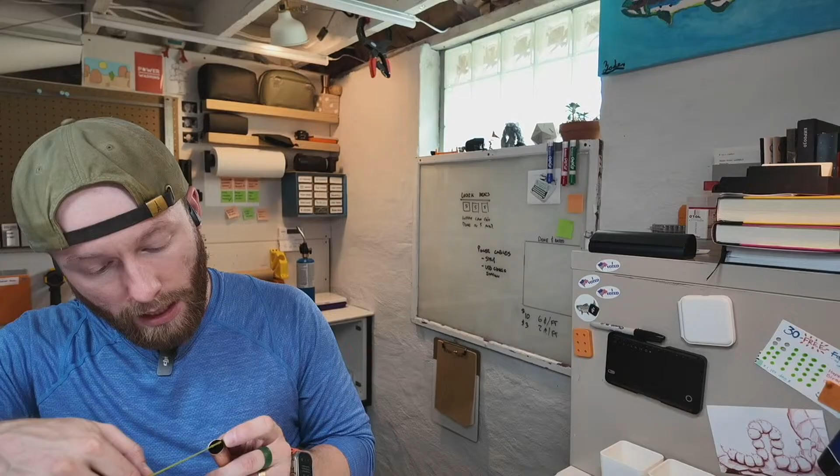First step is we need to take some measurements, and by golly, I think I left my calipers upstairs. We're going to say a 1/2 inch - actually, let's just measure it. Anybody know what a 1/2 inch to... actually it's not a 1/2 inch, it's 5/8. I'm glad I checked. So we're going to just do 5/8 inch to millimeters - we're looking at 15.88 millimeters.

So let's go ahead and put that in here. So I'd start a new sketch, we'll do top, and we can add a circle. There you go everybody, that makes more sense probably for everyone. 15.88, so that's a bit exact. We're going to add a variable - pipe, we'll do PD, pipe diameter. And then we'll just make this the PD.

I was watching my stream last week, and I was thinking about clipping some of it and putting it into the shorts. I was going to do some of the modeling stuff, and I realized I was spending so long being finicky with the names of things, it was actually kind of a bear to watch. So I apologize for anyone who was watching the stream last week and me struggling through naming variables.

All right, still no new questions. Oh, Gary Wallace finally catching up on the live. It's going good, how's work for you?

Curtis Willie says, any idea how you will do Etsy reviews when you start your Patreon? Congrats on 10K, by the way. Thank you very much, I would love a review, but wasn't sure if it would be on live stream or video.

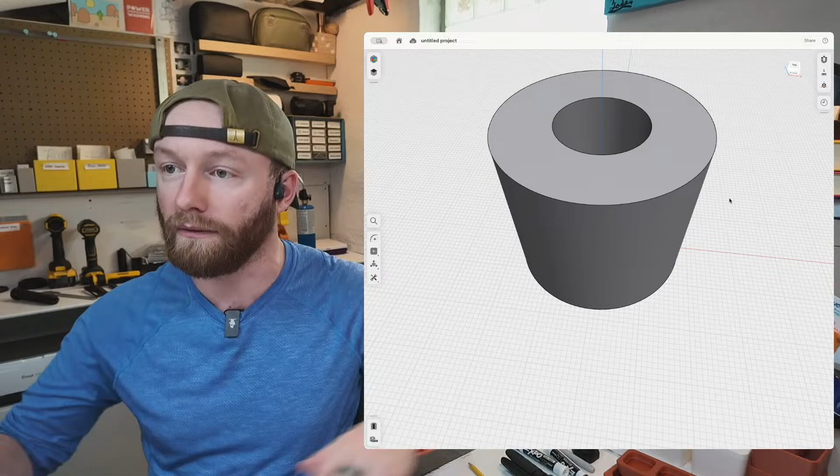Alkenan asks, any recommendations on starting an Instagram? Greetings from the Netherlands. I'm not super well versed on Instagram. I think the method on Instagram is probably similar to what there is on YouTube, and authenticity in your content is really important. My Instagram account is mostly just shilling product, to be honest, and I don't have nearly the growth. Granted, I also don't spend a lot of time there, but I don't put a lot of time into it, something I should probably do. But again, there's just so many things to do. With Instagram you need authenticity, not just constantly shilling product. You need to get on camera, show a photo, describe the problem you're solving, and give a reason for people to care, rather than just 'hey, this is my thing, buy it.' I think that's probably true of all social media at this point. People are pretty good at seeing through sales pitches, I suppose.

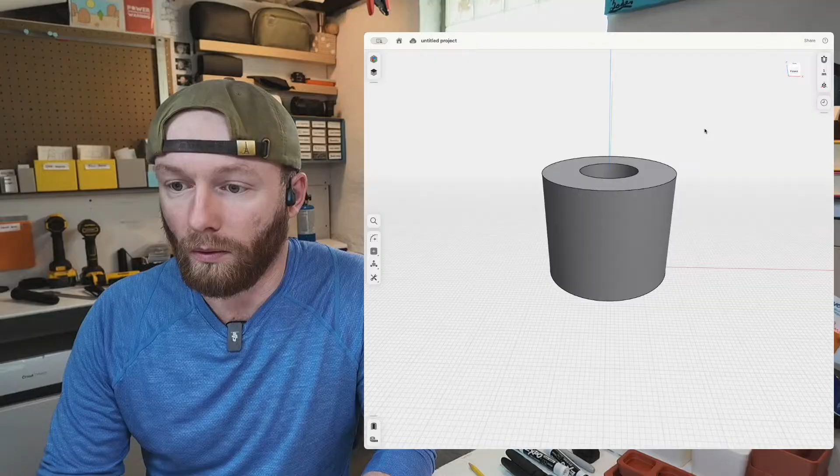All right, let's see here. That looks good. Let me actually focus for like 2 minutes. All right guys, 2 minutes, and I'm gonna get some more work done on this.

So we need to have that slip in. Now I've already measured off of the ceiling, I was thinking 4 inches is what we need, so that's gonna be a through hole. I guess I could actually go back down to this sketch. I'm learning that if you can reduce the amount of sketches you make, that helps, just keep things clean. So let's go ahead and do maybe 50. I want it a bit bigger than 10 - I know I said 10, but I need room for a couple screw holes or screws. Let's do 60, I like that number.

And then we'll go ahead and use a rectangle, diagonal to diagonal. This is going to be 60. And then we'll make this 4 inches, but I'm in millimeters, so 4 inches to millimeters is 101.6. So we'll make it 100 because that's also a nice number.

All right, so we've got our basic shape. Now let's go ahead and trim out some of this. That will be there—I guess we don't need that. And I guess I don't need the inner circle.

So, again, the struggles of doing this live. It's quite difficult to model and answer questions on a live stream all at the same time. But anyway, let's see here.

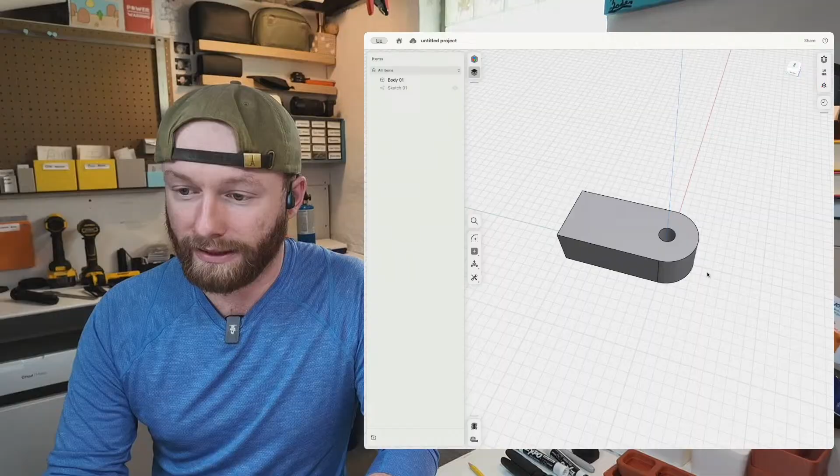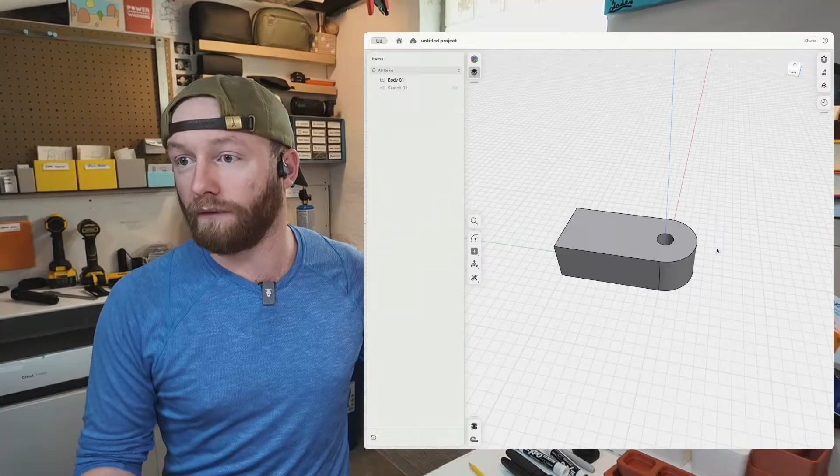All right, so we're going to make this 40. I kind of like that. So again, I don't think everyone saw it, but we're making an attachment for this copper pipe that I can mount horizontally onto my ceiling, and then put camera gear on it to use as a camera gear rail, whether it's a camera itself or lighting equipment. I have two of these that I'll be able to mount around my shop so I can quickly move the camera without taking up floor space, since I have very little floor space to walk around in.

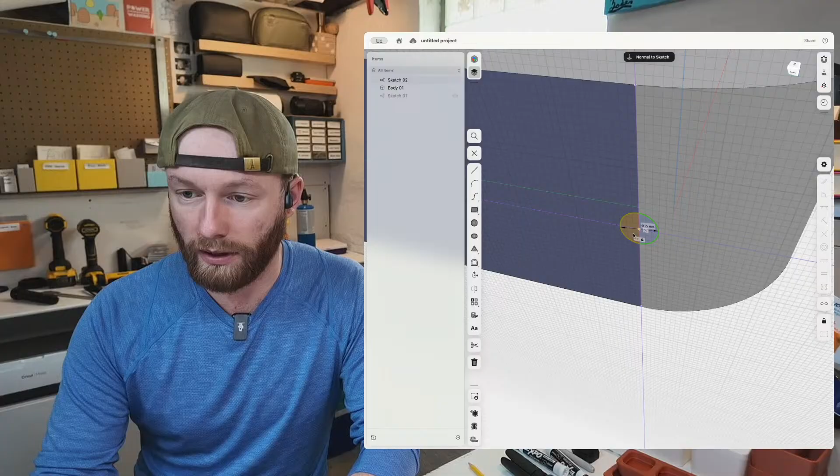So this is basically the shape that I need. Now the question I have is, how do we lock this, right? So I have some screws that we could use to create a locking nut. Let's start with here. I'm just going to do—we can do 6 millimeters. And then I'm going to grab both of those and we'll go in, let's see.

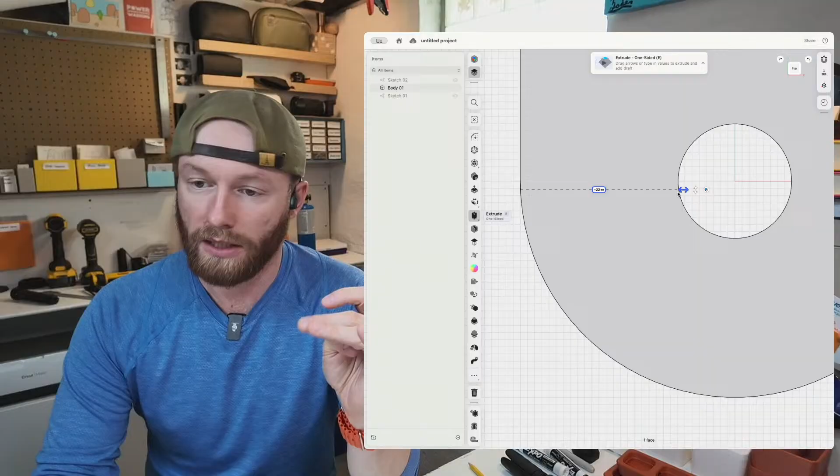If I go to the top view and then I pull that—the nice thing about modeling this way is you really can just guesstimate some of this stuff. So to break through, we're looking at about 21, let's say, or 22 to be safe. So if I want like 4 millimeters, we could do—let's do 19. I think that will work fine.

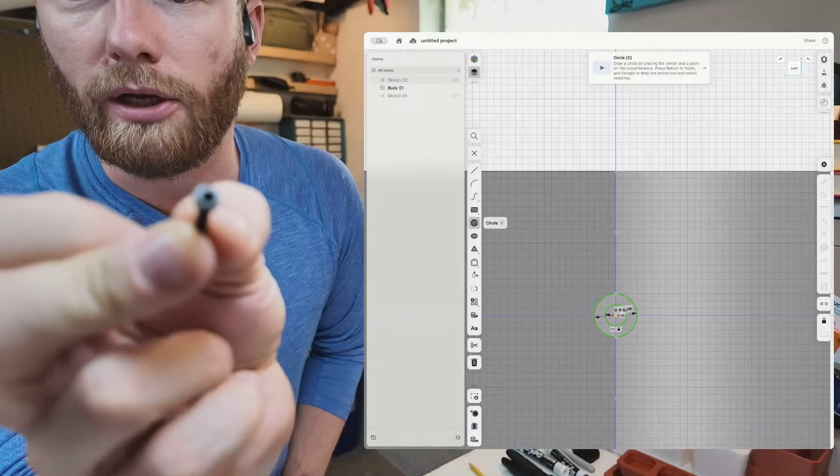And then we can go back to that sketch and we'll do 3 millimeters. What I'm doing is taking an M3 screw, if anybody's curious—I have some here. I'm not going to use this really long one, I'm taking an M3 screw like this. Which side do I got to be on? I know the dimensions of the head of the screw and the length, so we're going to use that. That way, when I slip the pipe in, I can just tighten that down and create a lock on it. That should be good.

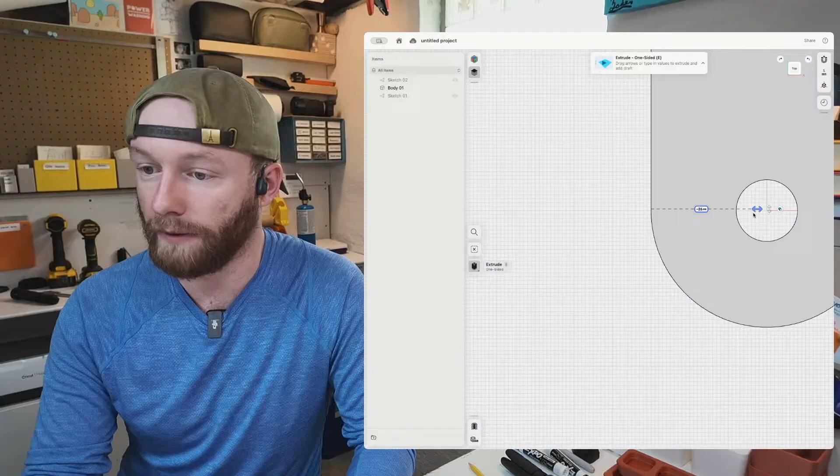Okay, what's the next question? Kaz says if you enter the dimension in inches and add a quote after it, it should accept it. No way, really? Hold on a second everybody, we're going to try this out. Just let me punch this hole through here.

Let's go back to a sketch here. So I can just do like, add a quote. No—is that right? Hold on. So if I go here and I type in 4 apostrophe, right, because that's what 4 inches would be. Doing that, it puts it at like 1,000. So we're probably like 100 times wrong, or 10 times wrong on that. If I'm missing something, that'd be really nice.

Let's see here, next question. Undersize the hole and freeze the pipe to shrink it. Yeah, I want this to be easy to take off and move around if I need to—my shop is very fluid in the way I use it, so I need to do that. John says try 1 inch. All right, we'll try 1 inch. We'll do 1 inch. 304.8 millimeters—that's not right. Oh, double quote? Oh, you're right.

See, this is why we don't do things live, everybody. Yeah, sorry, I used the wrong thing - quotes, not apostrophes. Geez Louise, I've literally tried this before and thought I knew that.

I should do these live streams more often like this because you guys are gonna make me better at my modeling. So cool, thank you everybody. That's actually gonna save me a lot of time.

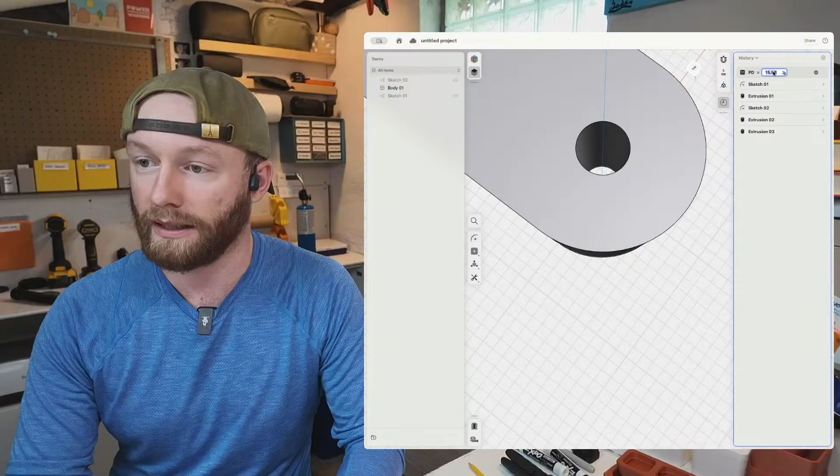Okay, so I want it to be a slip fit. I want it to go all the way through. So let's just change this to 16, so it is a slip fit. Let's go ahead and add some screw holes.

Now the way I'm gonna mount it, I was thinking about doing it like on the joist. So we've got 1.5 inches. Actually this extrusion right here, let's see if we can do it again.

1.5 inches. Invalid expression, get out of here. That's exactly what I was doing. Okay, so you can do it in the sketch, but you can't do it on the history part. So that's good to see.

Yeah, and Farticle, I just want to point that out - yes, I put in 4 feet. You live and learn, I guess.

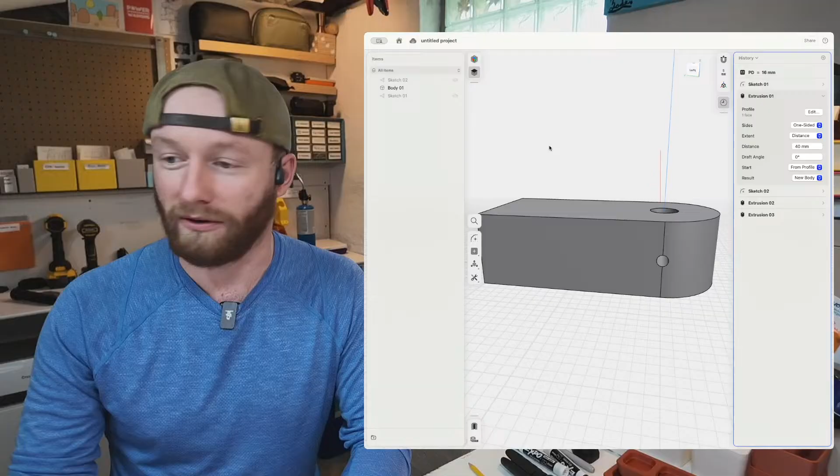Let me figure this out, because now I have to go back and do my trick. So we're looking at 38.1, so I was pretty close. We'll just do 38 because 38.1 is nonsensical.

What's the next question here? Mr. Benchy says, how would you add weight to a printed PLA product? I would add more plastic. That would be my solution.

With my design and how I model and design products, they should, for the most part, other than maybe needing some hardware, come off of the printer done. That saves me a lot of time, a lot of headaches.

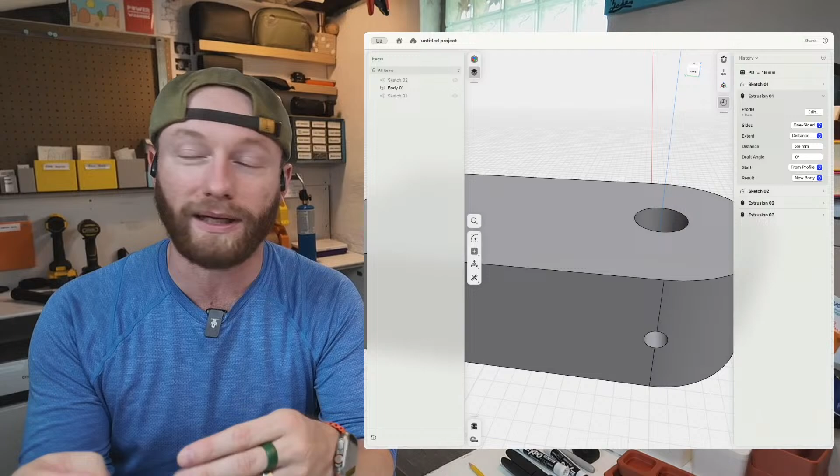I have seen videos where people will pour really liquidy concrete into their parts or add metal bearings, but honestly that either creates a lot of mess or a lot of hassle. So for me, I would just add extra material in there.

Even like 50% or 70% infill, if you're looking for weight, really does add a lot of weight. And it feels nice, it feels like a really professional product, I suppose. I think they all kind of do, even with the lighter weights, but it just has a different feeling.

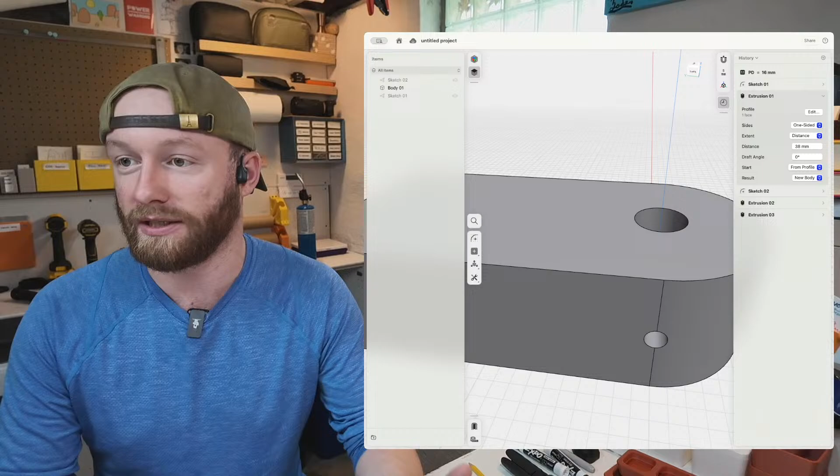Farticle, this is Shapr3D. Gary Wallace says if you make it in a two-piece design, you can make it like a shaft collar, be able to take it off and on without sliding off.

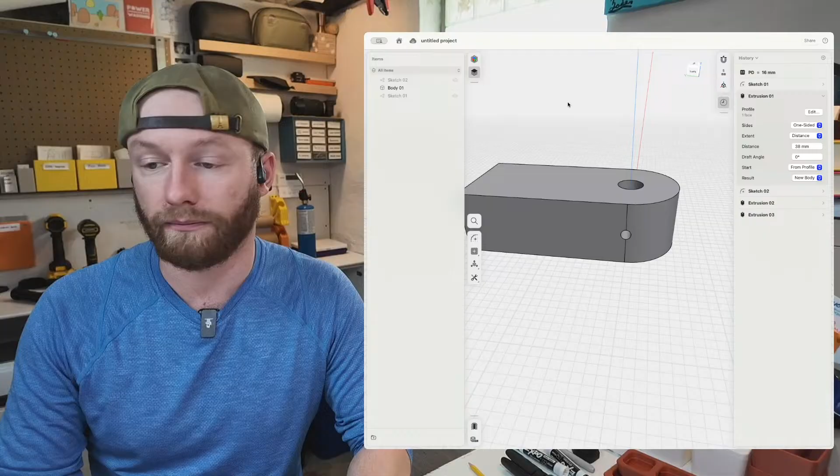Oh yep, I could do that. I should do that. Okay, we're gonna do that. Thank you, Gary Wallace, that's gonna help a lot.

So let's go back, and this is what we're talking about. So let's go to here, we'll go up 38 millimeters. And instead of putting the side hole here, we're gonna act as if this is two independent sections, and we can make it a collar like he was just talking about.

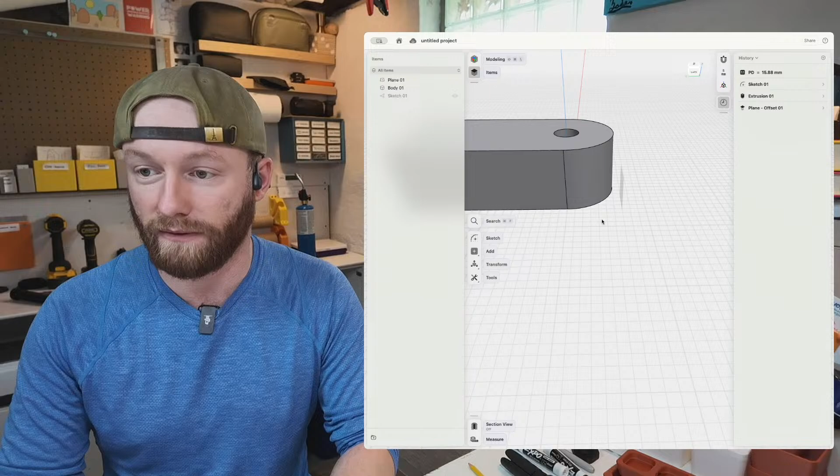So let's go to add construction plane. We'll do it off of here next, and then we'll just bloop, go to here. Hope you like the sound effects - I actually didn't mean to make that sound effect, I just did.

All right, now what we're gonna do is use this as a way to reference. We'll do 60 by 38, reference our holes. So let's go ahead and do, what do we have in the center there? Center, line it up. We had a hole that is 16.

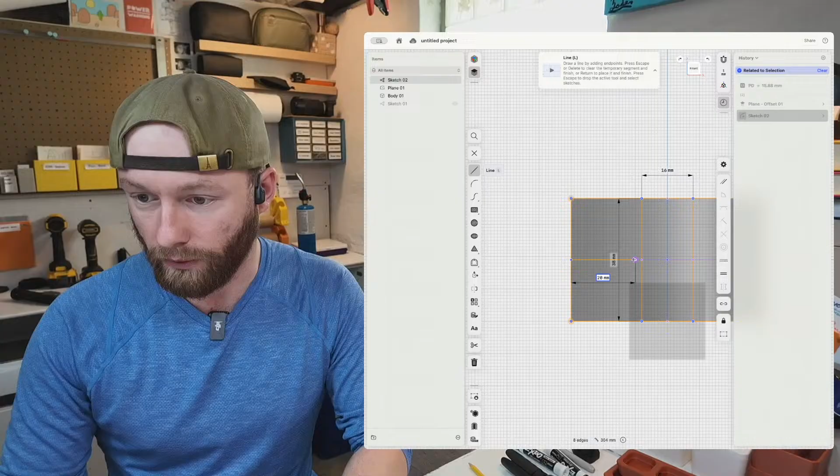All right, so just pretend that that's our hole going through the center, and this will be 38. Now I just want to have two holes that go through the piece here, so we're going to do kind of the same thing, right?

So we'll do 6 millimeters. I'll actually show another trick here once I'm done with this. And then we'll add another circle and we'll do the 3 millimeters.

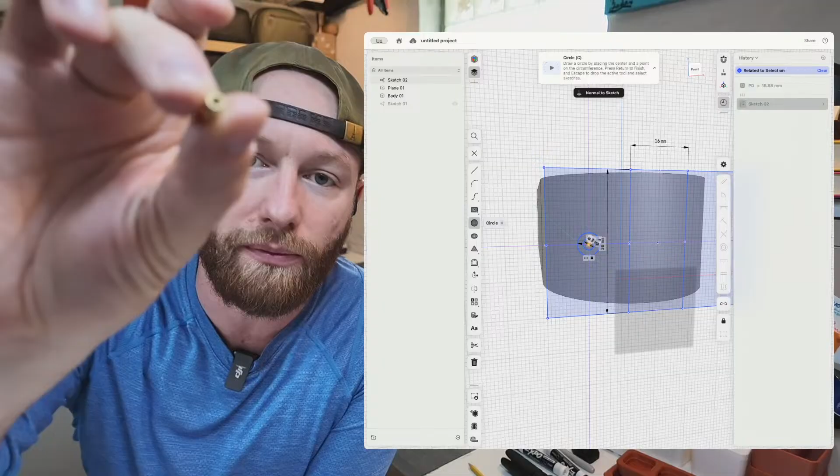So actually, thinking about this, there's one more concern, which I guess I can use - I have some of these. Again, another little tiny part, but I have some threaded inserts. I don't know if you guys can see that - some little brass threaded inserts.

This design that we're going with now essentially needs these threaded inserts because I don't trust screwing and unscrewing out of plastic a lot. I have a few products that use M3 screws to hold components together, but those components are not designed to come back apart. It's really just for ease of putting the part together or the product.

But if you were to take them in and out all the time, it would basically just become a hole and there'd be no threading there at all. All right, let me answer a couple questions here.

Have you ever created a design that needs to be joined together? If so, what type of joint technique do you use, like dovetails, Lego style interlocking joints, or something else?

I was basically just talking about that, but let me give you an example. I'm looking around to see if I have any of the parts out that I could showcase. I don't think I do. Oh, I do, right here. All right, so I have this piece right here.

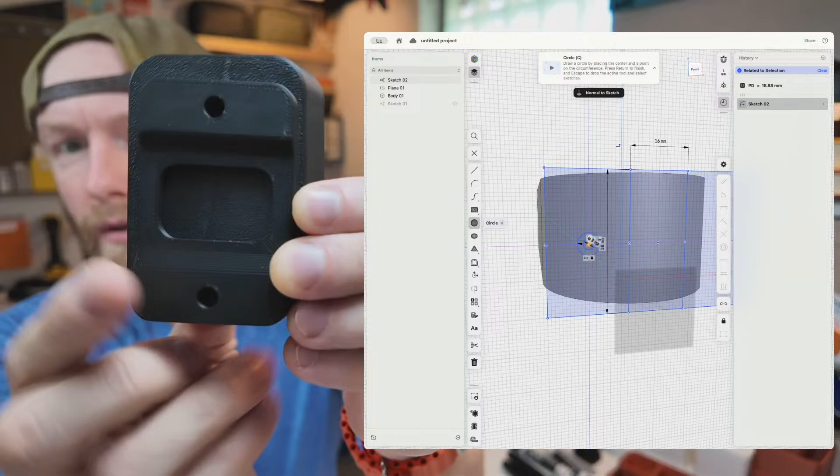It needs this little plate that raises it off the ground, so that when it's sitting flat on a surface, it doesn't rock. That's the same reason why mugs have a ring on the bottom - if the full flat surface is in contact, even the smallest piece of dirt can make it rock. That's not the only reason why they do that, but it's one of them.

So for this product, I'm actually just using butt joints. I'm taking a flat piece and a flat piece, and then taking 2 screws and mounting them together. It works fantastic. Now, I would not trust this for strength pulling apart, but it works really good because it's just its own weight set on it. It's not going to come undone.

For other pieces, I use dovetails. I have a coat hook, but I don't have any ready to go because the ones I've made I've shipped as a product. Dovetail is super strong. I have a coat hook that uses 2 screws mounted to somebody's wall, and I have literally tied 50 pounds worth of dumbbells to it and hung it up in my basement, and it didn't break. The dovetail is super strong, and that was just using PLA. I think it's a little underrated personally, but nonetheless.

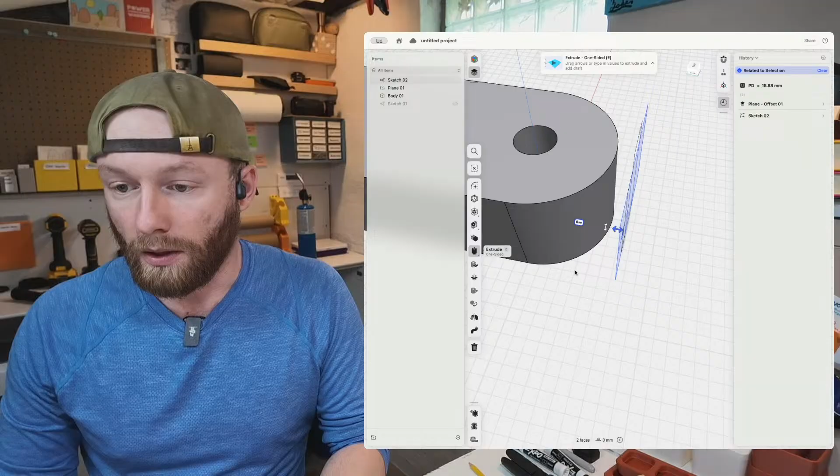So now what we're going to do is extrude this. This first hole is going to be the actual screw piece. So if this is 60, we're looking at 30 in, and then let's go 40. That's going to give us 10. Well, I've actually got to think about this a little bit. Let's go 50 millimeters - a little extra is not going to hurt anything.

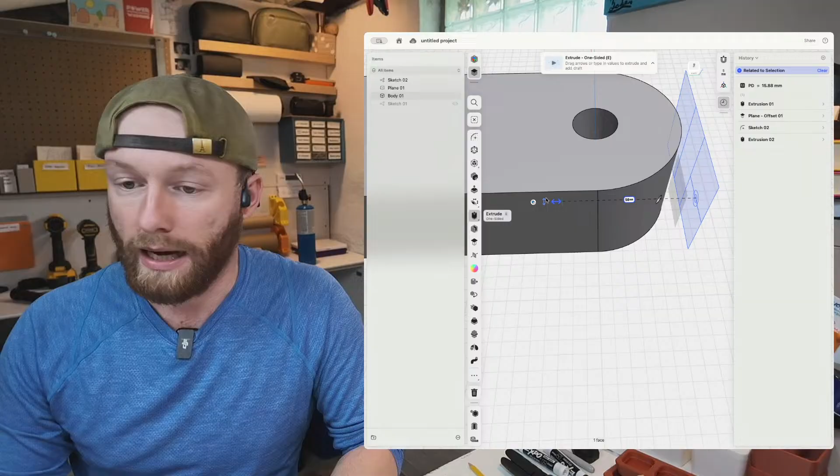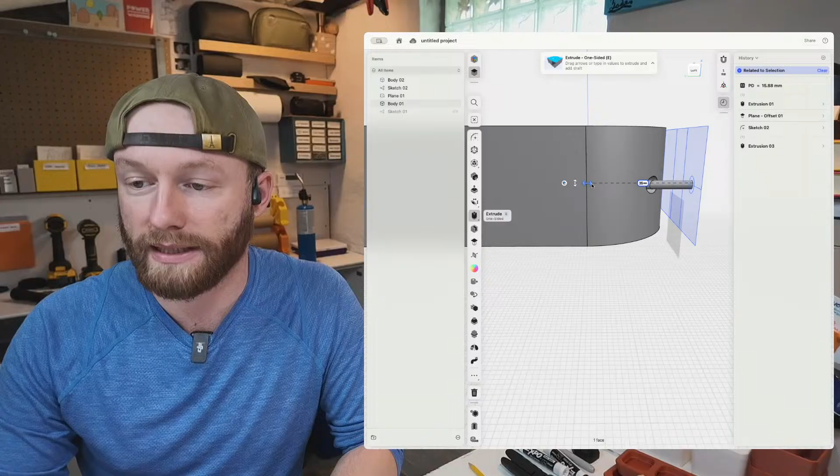Then we're going to do new body, and I'll show you why in a second. Then we're going to grab the outside here, and go again to center. We're looking at 30. I feel like I'm missing something here. It's because I have it offset - probably should have had it right on the plane. Oops, plane offset, negative 30. Now we do. All right.

So this, again, be 30, but we need it to be less, so let's go 35. Oh sorry, 25. And this is also going to be a new body. Or we could probably do union. Okay, so we've got our 2 pieces.

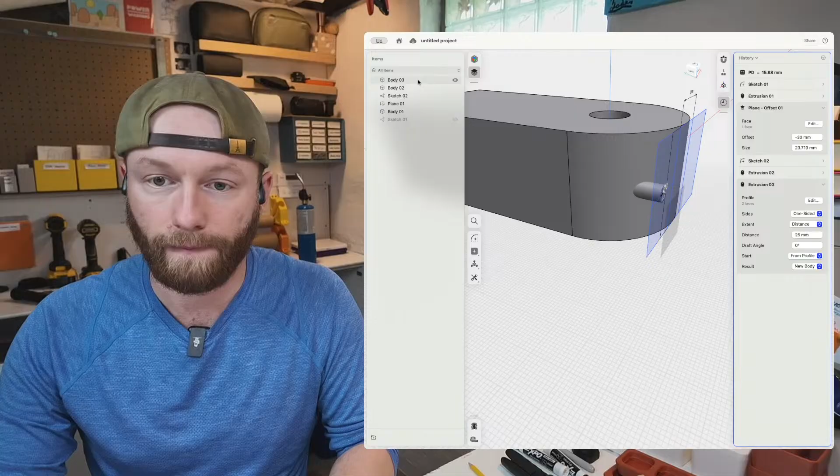Now if I grab this body, or both of these bodies - oops, did it wrong again. We'll do new body. Okay, we grab those 2, then we can use the mirror function and mirror it over this center line, which is right here. If I can grab it, I guess I'm going to have to put it on the sketch - that's fine as well. We'll do mirror and then over the center line, and there we go.

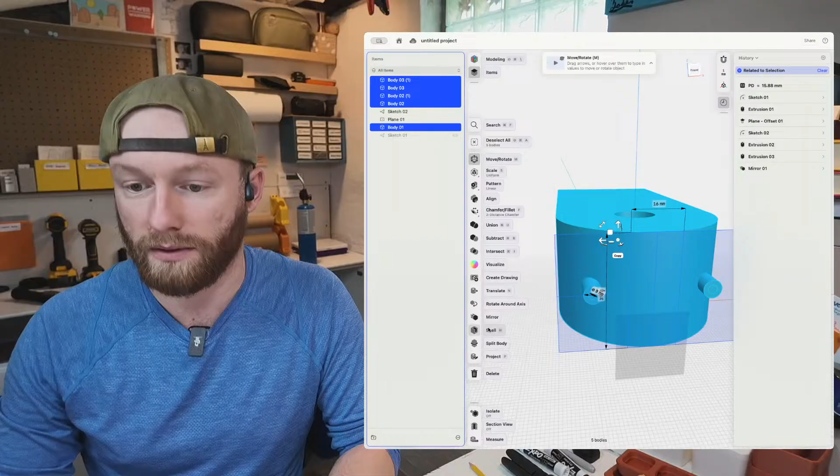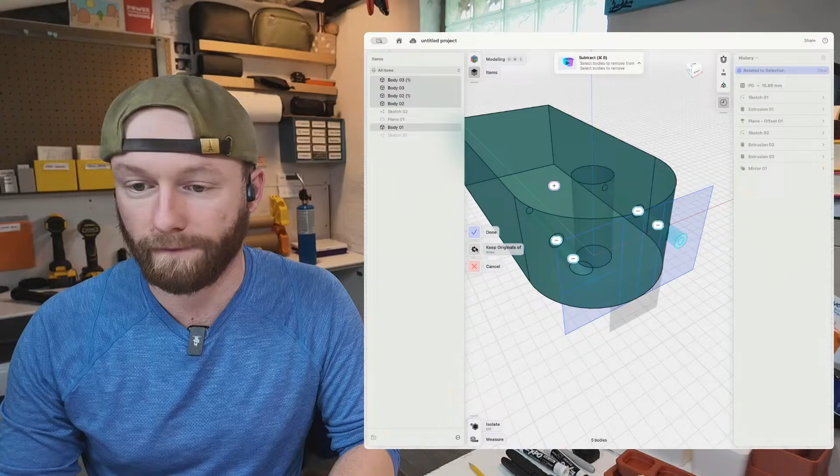And now I can just grab these 4 bodies and do subtract. Then I'll be able to answer a couple more questions. So we'll do minus - that needs to be a minus as well. Needs to be a minus. Grab that, minus, and then you need to be a plus. Okay, now we've got our holes and the other piece, so that's cool.

All right, let's see what questions there are. Gary says threaded inserts would work, but you could make it a pocket for an M3 nut. Yes, I could do that. I do have some M3 nuts, but I also have threaded inserts. So I'm going to try the threaded inserts because they seem a little easier than doing the pocket at the moment, and we'll go for that.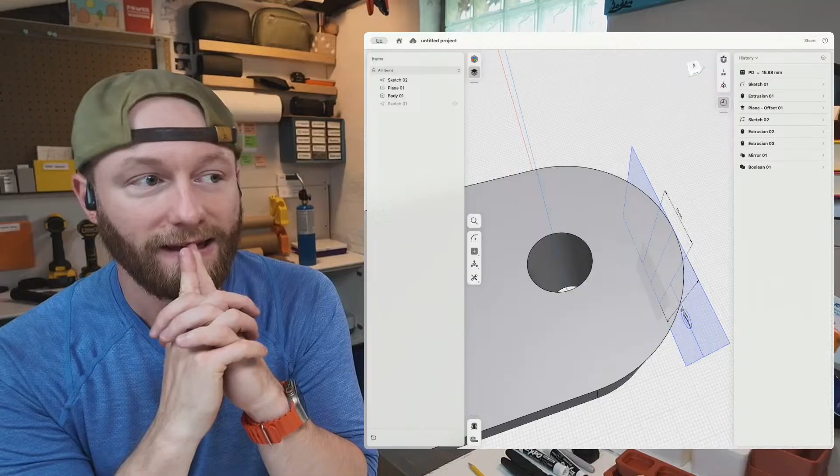Broden Cernet asks, do you think it's worth trying to sell on Etsy in Europe? My answer is yes. Now, I got lucky because of the partnership I have with Fuse Visions, because there's some extra steps in Europe that you have to follow around packaging. I don't have to worry about that per se. For most of my products that are not part of the partnership, I don't ship in Europe. It honestly might be easier to ship to other parts of the world, like India or Japan. I just know the EU has a lot of really strict laws that you've got to keep an eye out for, and that was added only like 3 months ago or something.

It's like the GPSR or something, but it says it in there when you're doing the shipping profile. I think it's under the shipping profile on Etsy with details about like, do you have the license or whatever for that. So I think that in itself would make me stop and maybe question if you should sell in Europe or not, is if you can pass that or not. I don't know. Is it worth the risk? Maybe.

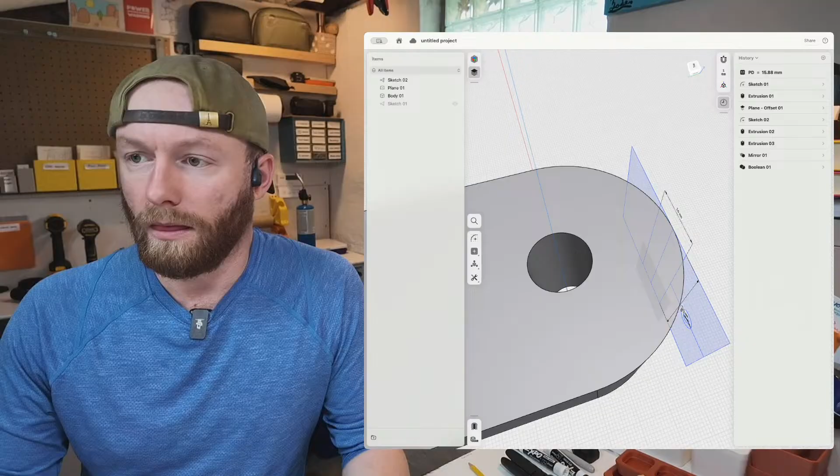Let's see here. Another one is, with Etsy's policy update, what do you think would be sufficient proof that you are the original creator? I mean, I think just the fact that you made a product and listed it on Etsy, I think that's almost sufficient proof, right? It's going to take quite a bit of time and effort for Etsy to validate that the thing you made and is your design was taken from Maker World or something like that. I think they're more so going after listings where there's like 100 duplicate listings and it's clearly the same product.

Also, per terms of service on the licensing, the people licensing their designs, if you sell their product, you have to, from my understanding, list that you're selling their stuff. So I think the big one was like Cinderwing, right? You have to list that you are making and selling a licensed Cinderwing model. And that specifically would be right in the text. Etsy could just pull a report that says, tell me all the listings that have this in the description. So I think that would be not too bad.

And then on the same line, Donahoe, you said Etsy can't validate even duplicate listings unless they have the same photos. I would really caution people to say that they can't, because I think what we need to be aware of is that with image recognition technology and AI, it's going to be a lot easier to figure out, or at least compile a list of potential listings that are a problem or going against that policy. Because all they have to do is use some image detection software and plug that in with AI and say, here's all of our stores, digest this data and compile a list of stores that appear to have the identical product. So I think it's going to be easier for Etsy to do it than people are making it out to be, because the tools exist. It's just whether they implement them.

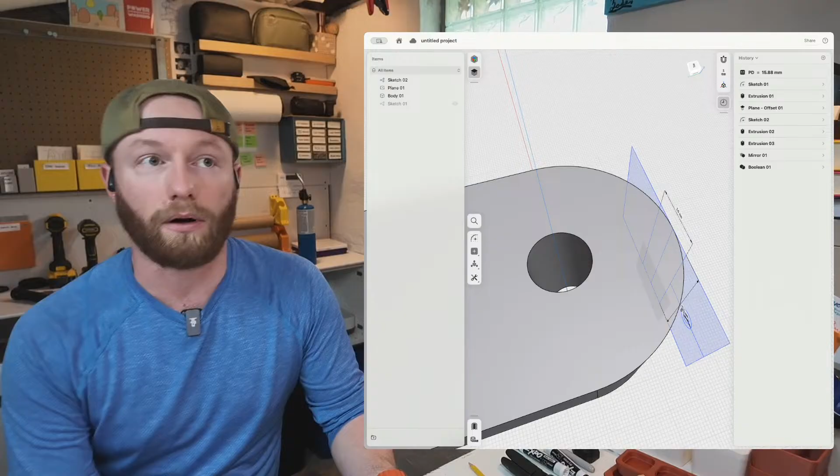Yeah, I guess they're not the ones to validate, but I think for the most part, if you made a design, it's going to be a lot of effort for someone to steal that exactly. Because even if they do model your project, it's probably going to be a little bit different, and obviously the photos will be different. So I think really what Etsy's trying to do is not snuff out competition, they're trying to snuff out identical products. Because in a free market, you want competition, you want people building products that solve the same solution, because that's good for customers and it creates a marketplace that customers can shop around on. But what's happened is you have basically competition, but the competition is through literally identical products. And when that happens, the only thing you can do to stand out is a race to the bottom on price.

So it's not an ideal way to have a free marketplace with just the same product over and over. And it's also against kind of what they used to be, right? Handmade, unique products. So again, looking for competition with different ideas rather than competition with the exact same product.

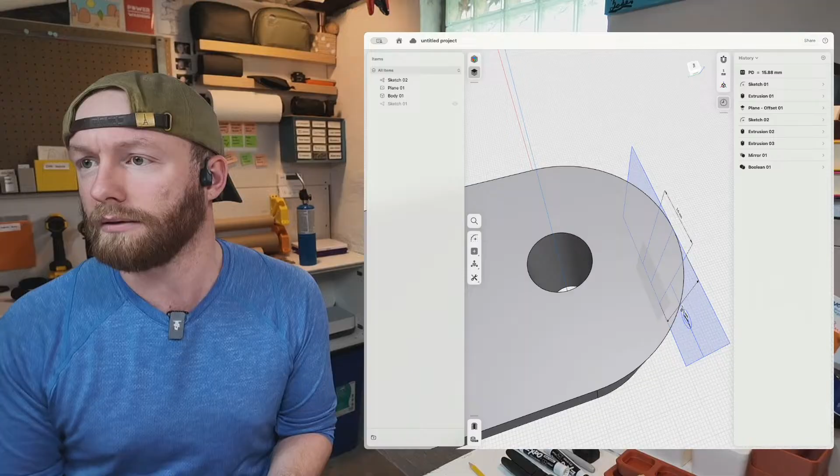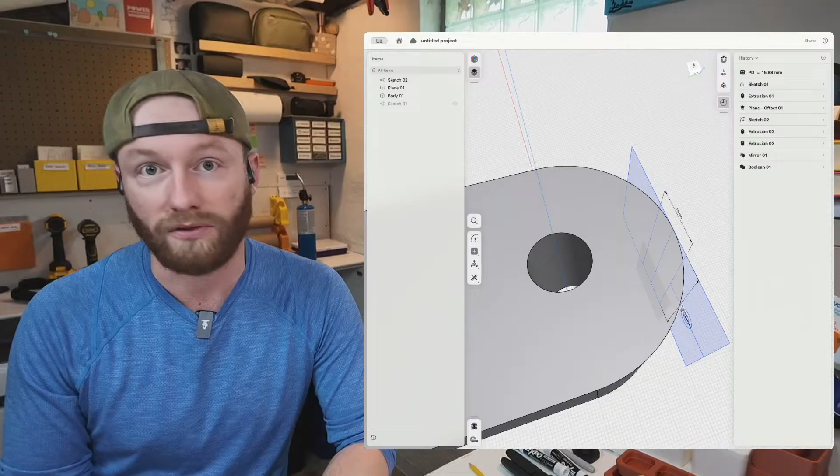Ollie JT, Etsy actually wants to enforce this. Yeah, that's kind of what I think too. And I don't think they'll get all the listings either, right? There'll be people who still sell licensed products, but there's so much that is identical, and I think it's also going to be a setup to go after drop shippers as well on the platform, outside of the 3D printing community. This is not me saying anything about using licensed products, but people who are just buying stuff off of Temu and those platforms and then putting them on Etsy and reselling them, that's not what Etsy's for, and that's not what Etsy wants to be. So I think this will help them address that.

Okay, let me go back to some of the modeling. We've answered some of those questions. So I've got the holes in there, and you can see that, which looks cool. Now we're going to want to make the collar piece. I don't want the collar to be perfectly flat because I want to make sure that it can seat.

Oh, sorry, I think I missed a question here. Dustin says, I do Europe orders too with no extra special packaging. Okay, so maybe I'm overthinking it, which would not be unheard of.

We're going to go in 5 millimeters, and then let's go over 5, go down 5. What I want to do is create a way to, sorry everybody, it's literally me thinking and trying to do this at the same time. We're going to go up 5 because I want to be able to put the collar on and have it nest into place so I don't have to fiddle around with it, because I'm going to be holding a pipe, putting a collar on, grabbing my drill. So there's going to be some steps here, so I'm trying to make it as easy as possible to do.

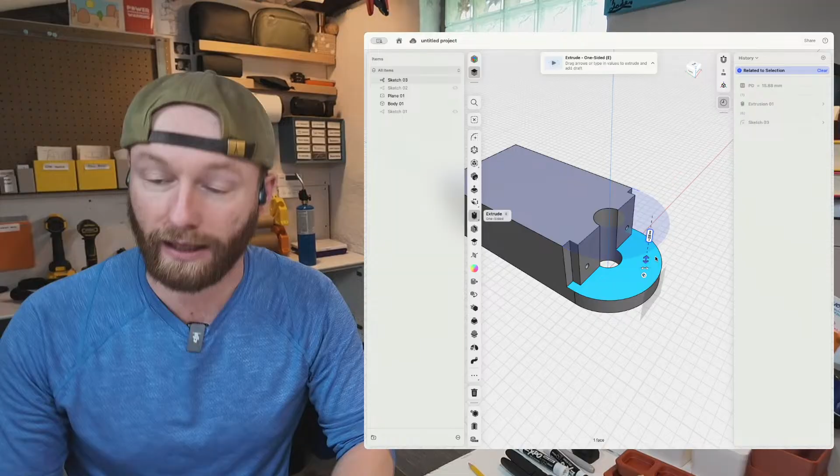That looks great. And now we can grab this, we can pull it down, and it looks like I'm ruining all my work, right? But once we get here, if I go to this, go to new body, we'll save that. And then we're going to grab the new body, grab the other one, and then do intersect.

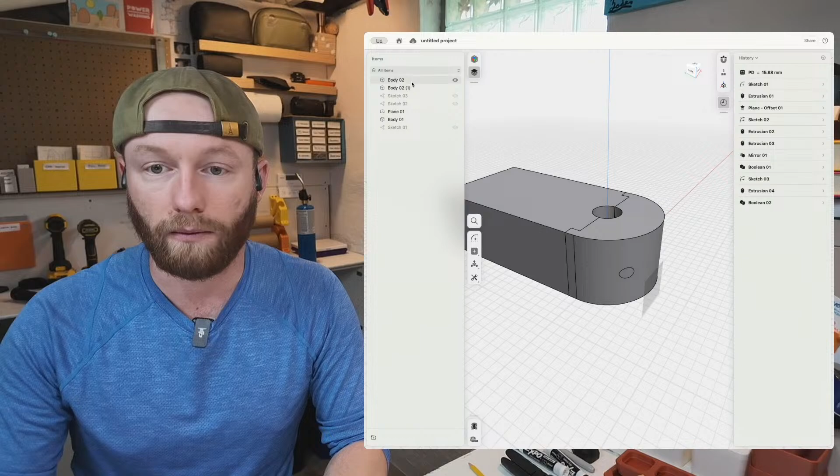And we can keep originals. Done. And then we're going to grab the body, and then we're going to do, let's see, which one do we got here? So we've got one of the collars. It doesn't have, oh, that's not the collar. That's just the, there we go. So here's one of the collars. Pretty cool.

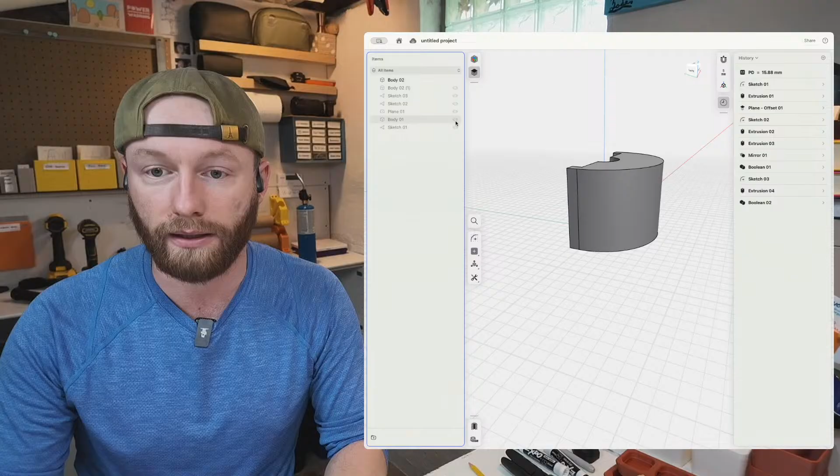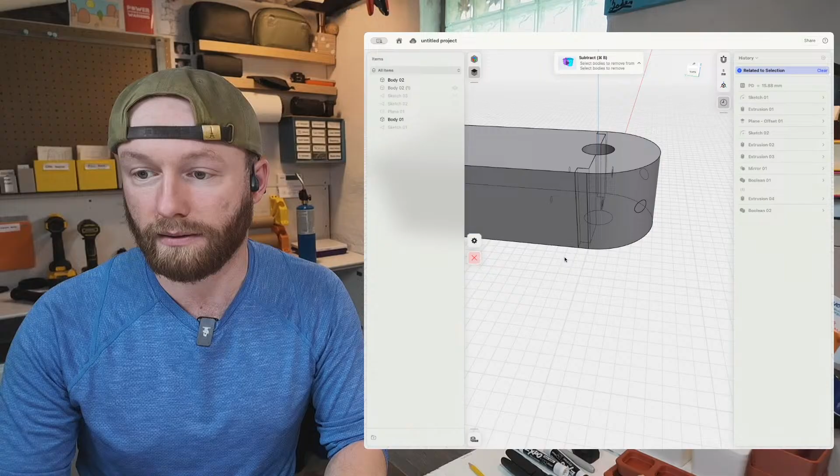And then we can do this body and our main one and do subtract. Always takes me a second. That's the plus, and minus, please. I'm pressing the wrong thing here. Grab this one, grab this one. I want you to be plus, I want you to be minus. Thank you, look at that. We have a collar. I think we did it after much frustration and toil.

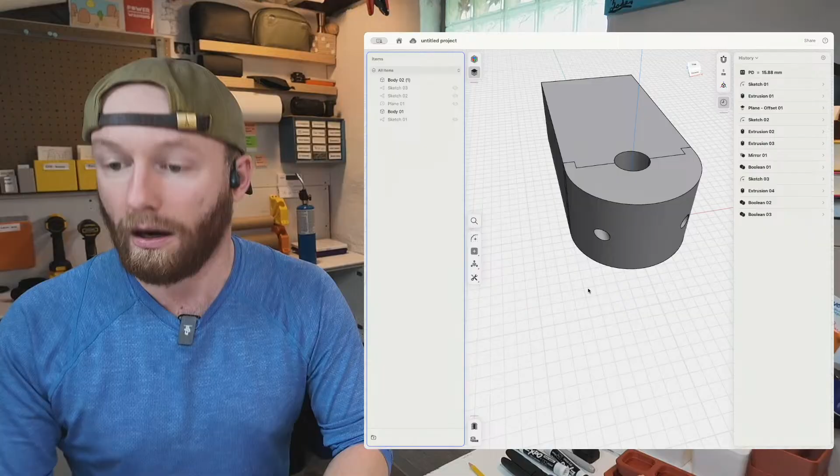So now we should have, right, if we go to our other body, we have a collar. We have a way to put the pipe in, we can put the collar on, and then we can use the 2 screws to mount it. Now, something to think about is I actually might need 4 screws. Looking at it now, it might make sense to do 4 screws, but that would be pretty cool if we could just get away with 2. So what I'll do is I'll do a test with this to see if that's enough.

All right, next question here, and I'm literally just letting my coffee get cold. All right, so please don't take this from me, but I came up with a saying, and it's such a dad joke, but I love it: if coffee's so good, why is it always trying to be warm? Because honestly, do you like iced coffee or hot coffee? Sorry, that's my dad moment of the day.

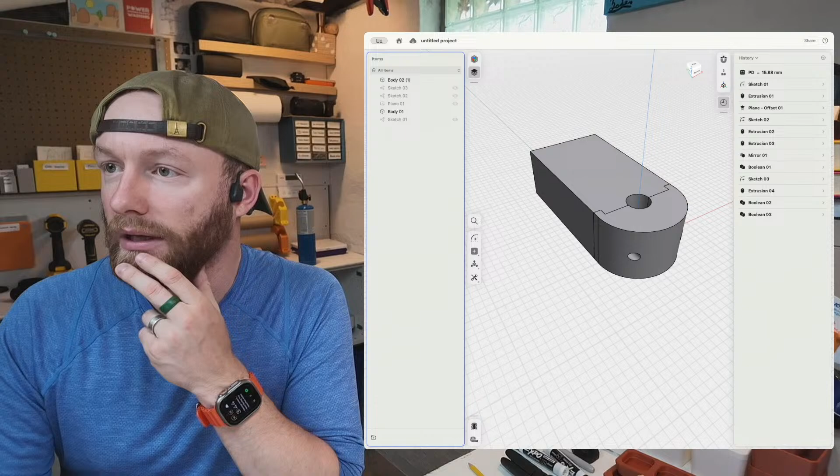If you live in Europe, is it worth having a presence in America—like selling your products here in the US—not through direct delivery, but through a service like Slant 3D?

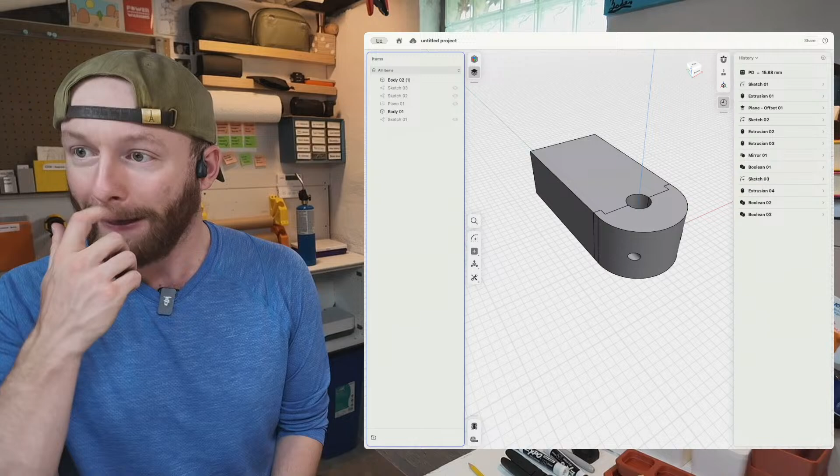What are the disadvantages? I can't speak to Slant 3D specifically. I know there's been some videos floating around about them, but honestly, a lot of the stuff on how to design for manufacturability is something I watch their channel for—they have good content on that. But the reason I didn't go that route is because I both make products and manufacture them. Why would I go through the extra manufacturing work when I could just have someone else do it? Maybe it's because I don't trust people, but that's probably not it. It's because I don't get that last touch.

I think more important than just having a product is the entire experience—doing the packaging, writing a thank you note. I write 'thank you for your support' with a little smiley face and my name on every order. I just realized yesterday I've done this for 500-plus orders over the past year, which is crazy to think about. But it's that final touch—you know what the product looks like, you can maintain quality standards, do the packaging, do the handwritten notes. Those are things a fulfillment center just won't do for you.

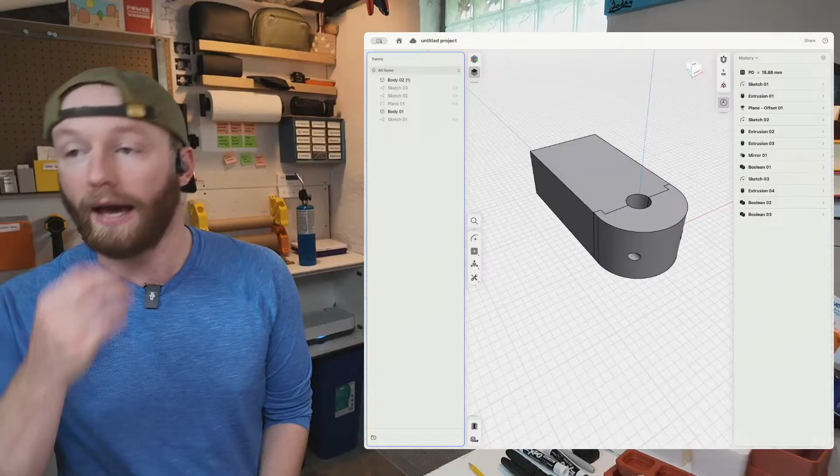On top of that, what I'm encouraging everybody to think about is there are a couple ways to approach business. You can go in with the mindset of wanting to be on Shark Tank one day—scaling, getting to mass market, into box stores or QVC, or a massive direct sales push with a website requiring tons of ad dollars and investors. The first part of that is building a good product and probably protecting it with a patent. That's business model number one. What I'd encourage instead is thinking about business models that support you and your family and give you more than enough to live freely—a model that doesn't require somebody else to do the work.

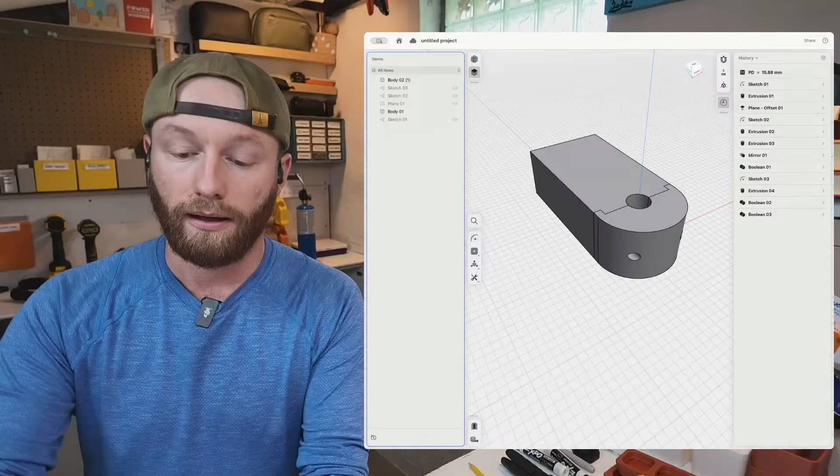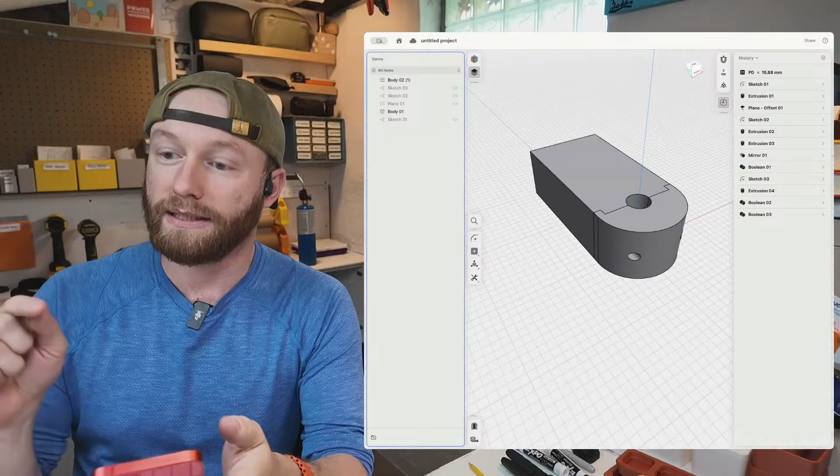Just do the math. The average household income in the United States is around $60,000—let's say $65,000. It's not going to get you a super cushy life, especially in places like New York or LA, but in more affordable places it's comfortable, as long as inflation doesn't keep going up. So, $65K—now let's figure out how many orders you actually need. Divide that by 12 months, you need about $5,500 a month to be okay.

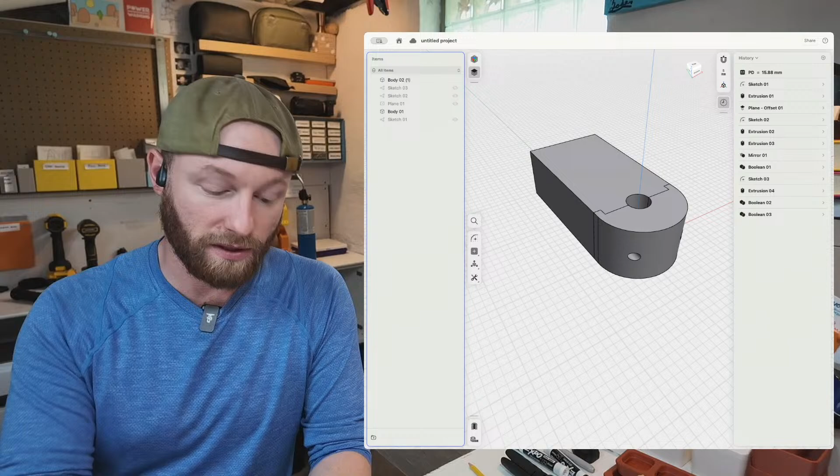If you want to figure out how many orders you need, let's say your products net you $20 per order—you're looking at 270 orders a month. Dividing that into sales per day, if you net $20 per sale, you'd need 9 to 10 orders a day to make $65,000 a year. That, to me, is sustainability—that's freedom. And that's on the low end. Managing that amount of 3D printers and the work involved is super doable. You could get 10 printers over time, print overnight, pack in the morning, bring it to the post office, print overnight, and repeat.

So if you think about business that way, and I think that's what I'm trying to show everybody, is that there's different ways to build a business, and you don't need to try to go to the moon with everything you sell. Anyway, that's me ranting, but I hope it gives some pause for thought on that.

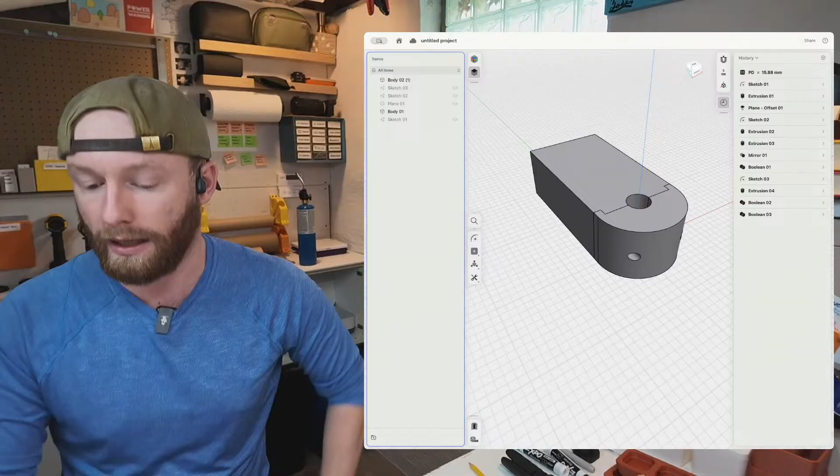Curtis says, don't mean to keep beating this every week, but any new progress on Amazon? No, there's not any new progress on Amazon. Their back end is frustrating. I applied for Amazon Handmade, which is separate from the other Amazon thing, and I haven't gotten approved yet, it's still pending. Also, I wanted to get my tool related stuff up on Amazon, but the struggle is I have to redo some of the packaging because they don't allow you to say the brand name. So you could say charger brackets, wall mount charger brackets for DeWalt DCB 115 chargers, but right now that's not what the packaging says, and you have to show the whole thing. So it's actually a lot more work for me to get those products on Amazon than some other activities that could make me money sooner through product sales. I've been focusing on what can move the needle first, the fastest, and that's still on the list, but no, I haven't made any progress. I definitely need to do that.

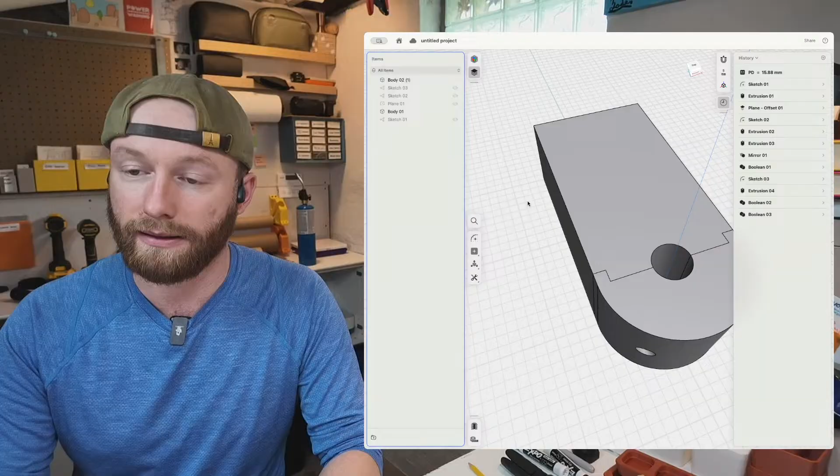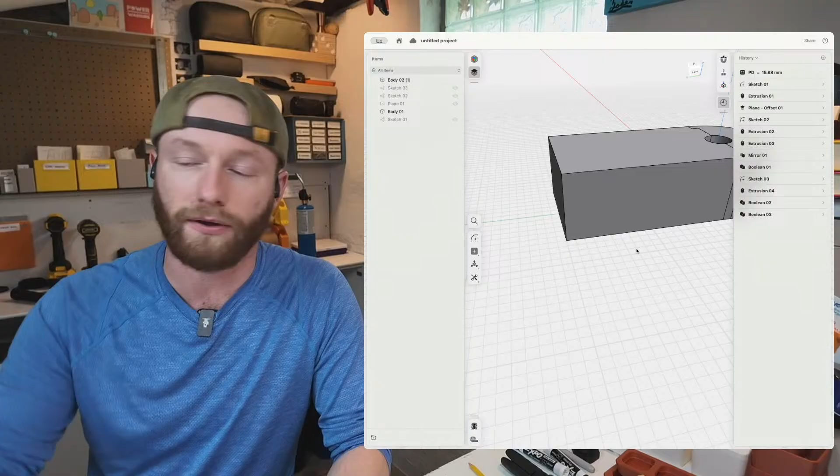All right, back to modeling here. Let's go ahead and get the screw holes in. Now we're gonna need to mount this somehow, so I think the way to do that is by putting in a screw. We're just gonna use drywall screws, I use those for literally everything. I know they're maybe not the best use case, but they work for me here. We're gonna do a diagonal drywall screw in here. I think someone mentioned pocket screws earlier, and that's exactly what I was thinking, doing some form of pocket screw. So I'm trying to figure out the best way.

We'll do add construction plane, drop it here, and then we'll go down. We went up by 38, right? So that's going to leave us with 15, 17. 17 is half. Cool. This might not be the right way to do it, but I want to test it out. So let's go ahead and just drop a line here, that's going to be our center line. We'll make it a construction so we don't forget that. And then we can go over maybe 15, and then I'll drop a piece here. Now this needs to be, let's say, 25 degrees for kind of the pocket to be able to get the screws in.

And then we just need to do the shape that we want. Now the actual hole needs 4 millimeters, so if we go 2 millimeters and 2 millimeters, and then we bring this up by, I think we could do 10 again, right? That's kind of been my safe number that I've been using. Go up here, go out. We actually only have to do half of this. So what am I doing? Only need to do half of it, here's why. We're going to do 15. I lied, I did not lie actually, I was just wrong. And then we're going to do 3 out here, and then all the way down, just like that. And then this will extend it a little bit too.

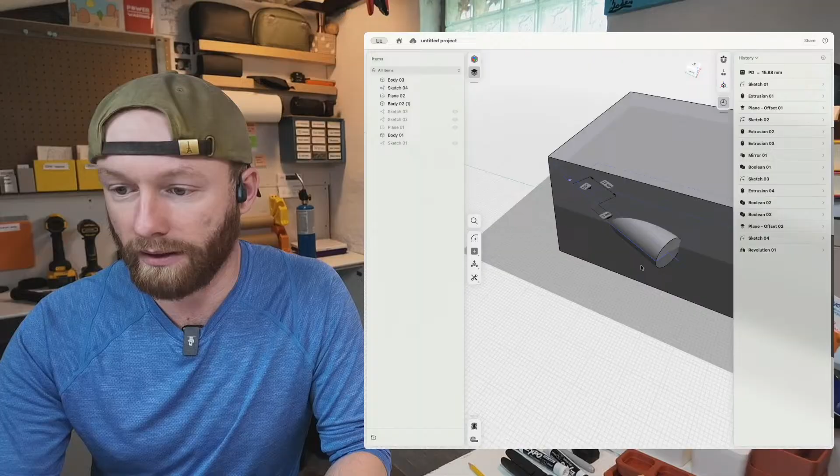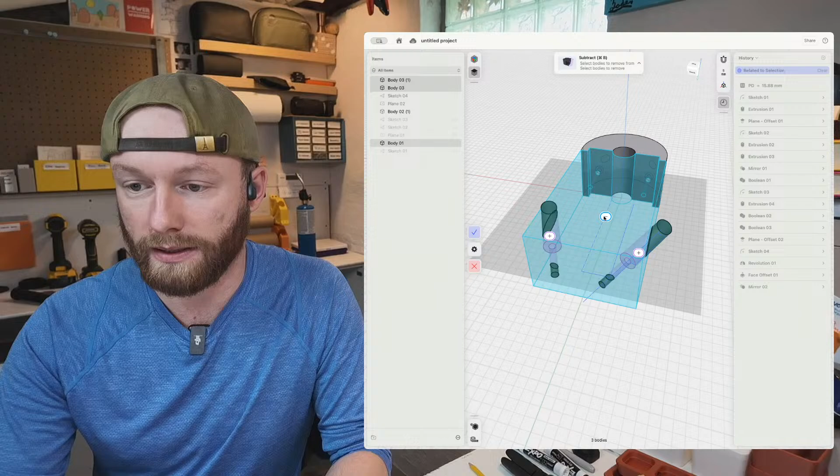This is a little messy, to be really honest with you, there's probably a better way to do this. But now what I can do is take this shape and I can do revolve again around the side. And we've got our shape. And we can do this, we can do mirror, right, like we just talked about earlier. And then we can grab both of those bodies and this one and do subtract and plus. Oops, we want that to be a minus. Minus, minus. Boom. Let's turn off these sketches. Look at that, we got a part. Now we just need to make it pretty, put some chamfers on there, and we'll look good.

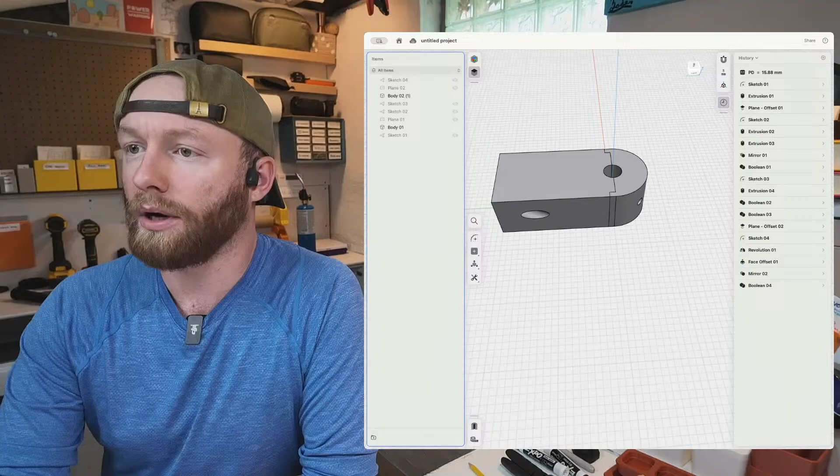They list their product as XXX mounting feet instead of mounting feet for XXX, which is technically a trademark violation. Yeah, that's really good to know. At least Amazon tells you that very clearly when you're setting it up.

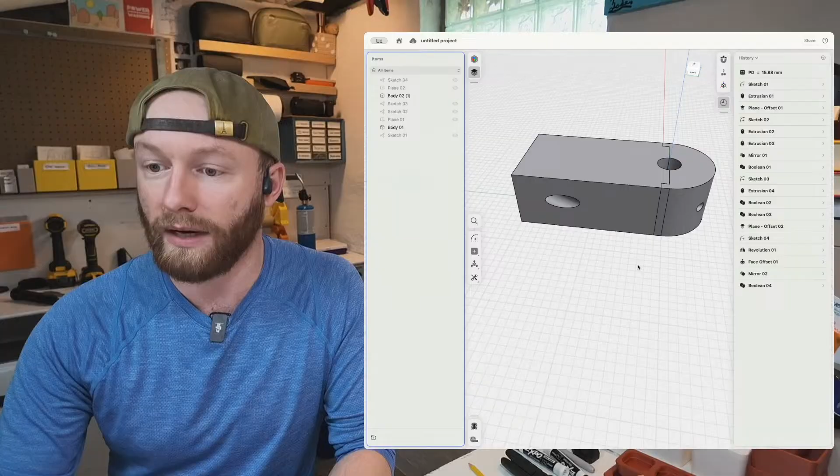Christopher asks, when starting an Etsy store, how many products should you start with? I believe Etsy recommends 5. If Etsy recommends something and you're selling on their platform, I'd recommend doing it—there's a reason they're telling you to. But when I first started, I listed 1. I think it really depends on what the product is and whether it's a quality product, and that should be your first focus. As you get better at design, you can add extra stuff down the road. But if you have the ability to put up 5, that'd be really good. And if those 5 listings are complementary products to each other, that's even better, because customers shopping might see one listing, want to buy it, then add something else to their cart so you get a bigger order total. So think about those things.

What they call that is the peanut butter and jelly method. I don't know if that's the official term, but that's what I call it.

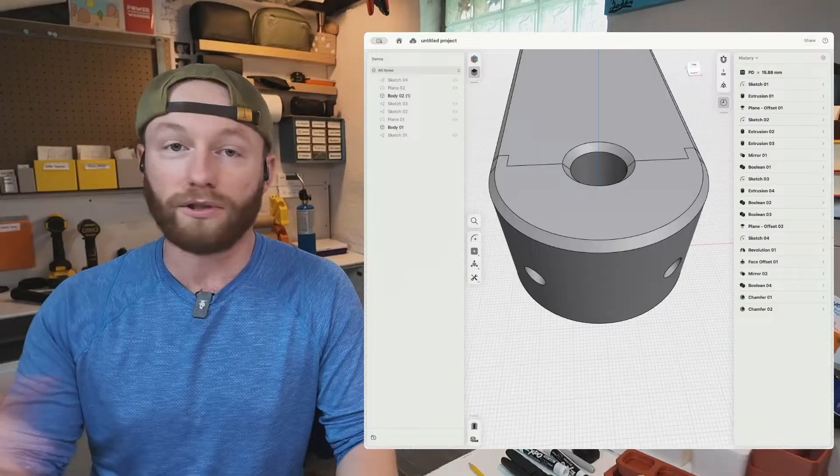Mountain Printing Solution asks, what do you do for coming up with ideas to model if you can't come up with good ideas in the moment? That's a great question and will be somewhat the topic of this weekend's video, but basically I find things that really bother me and I make those things. If every day I run into a problem and notice it's super annoying, that's usually when I stop and think, wait, this really bothers me, I think I can use 3D printing to fix it. Then I ask, is this something I'd just use, or could other people buy it? This product we're designing today probably isn't something others would buy, because it's not a product by itself—you'd need a 5/8 inch copper pipe to use it. I don't think that's necessarily useful, though maybe the STL file could be sellable. But yeah, look for things that bother you, because if it bothers you and you have a solution, I'm sure it bothers other people too.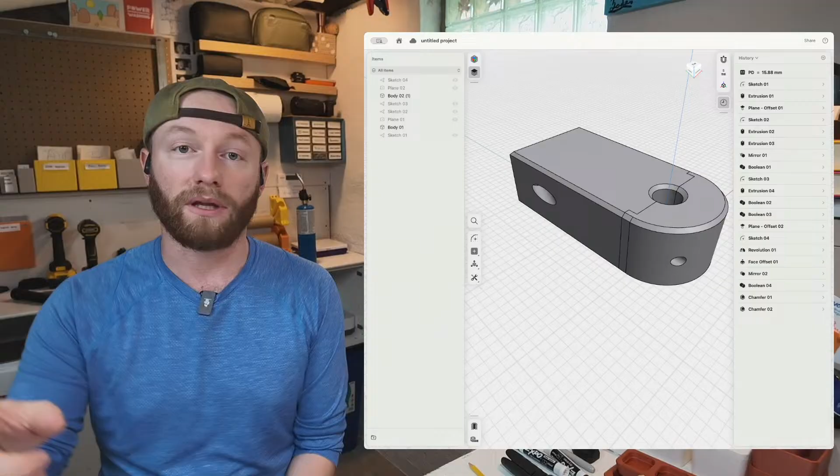RP Studio asks about the 3D modeling software I'm using—is it better than Fusion 360? My answer is maybe. It's better for me because it runs well on my computer; Fusion 360 does not run well on mine, and it's very bloated for what I need. But if you need a lot of extra features, Fusion 360 is better. The one thing I really miss is threading—this doesn't have built-in tools for standardized threads, which would be super helpful, so I have to make custom threads. Maybe I'll show that next week in my live stream.

Kaz says, bad idea is better than no idea—just create something. Absolutely, Kaz is speaking truth down there.

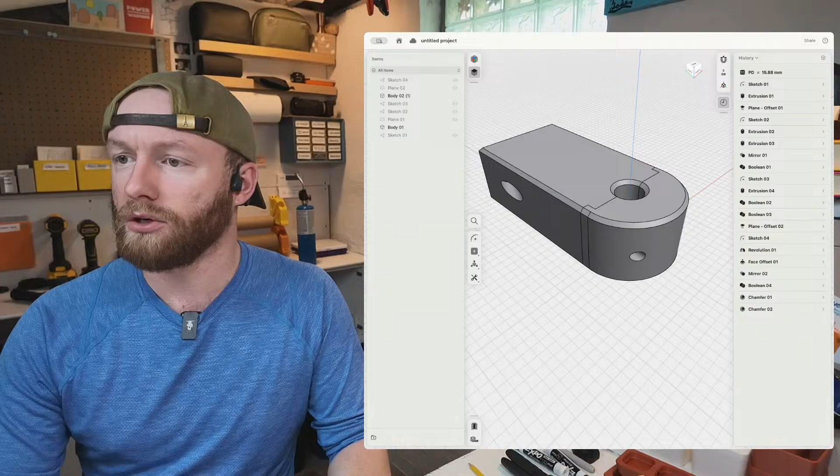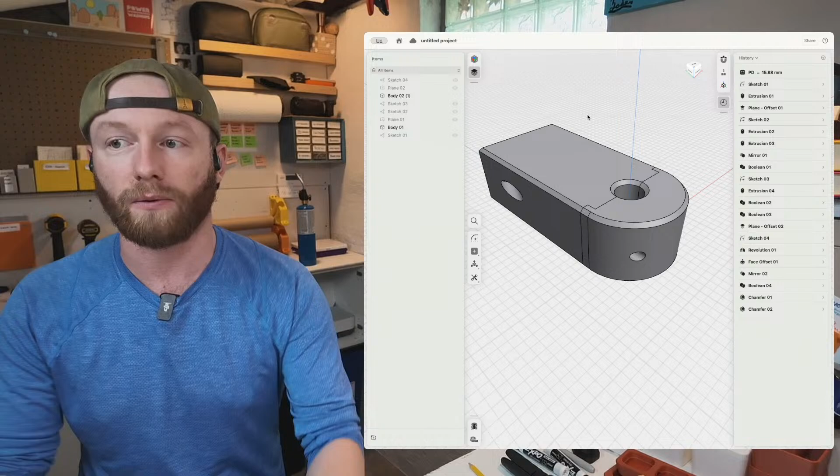Wild Muffin asks, do you ever get potential product ideas from people you know, like a solution for a problem they have? Absolutely. Once people find out you 3D model and design and sell things online, you'll be surprised who comes out of the woodwork asking, hey, can you make this or that. So there's never really a lack of ideas—it's more that you'll hit a threshold where you have too many ideas, and you have to pick which ones to work with rather than coming up with new ones. It's like a wave: you'll have lots of ideas sometimes, then go through them and be back to not knowing what to do, but that's just part of the process, part of the fun honestly.

Adrian Hardcastle says, they try and get 5 to—wow, hold on a second, people, let me get a sip of coffee here.

Adrian says they recommend getting 5 to 10 items on Etsy so your shop looks busy, and you can take advantage of the first month boost new shops get. But start yourself first. Yeah, 100% on that.

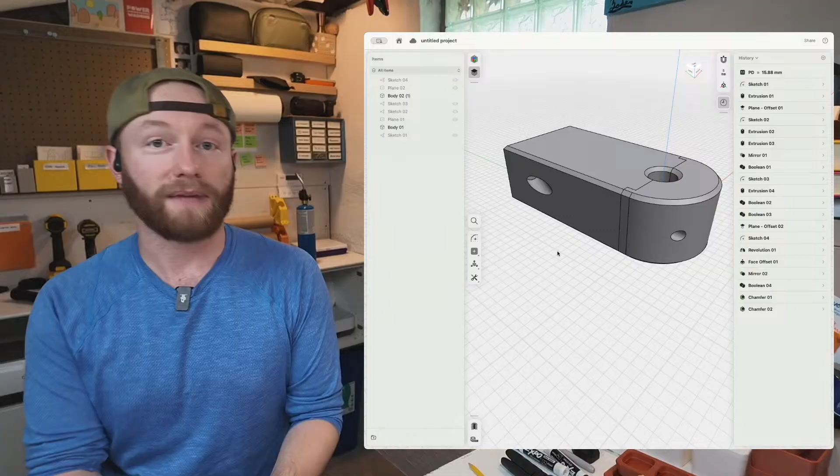Garage Toy says he made a mount that would clip onto wooden window blinds to hold Christmas lights, instead of suctioning to the window because of the cold. That's a great idea. If you sold that in a pack of 5, or sold the STL, that'd be cool.

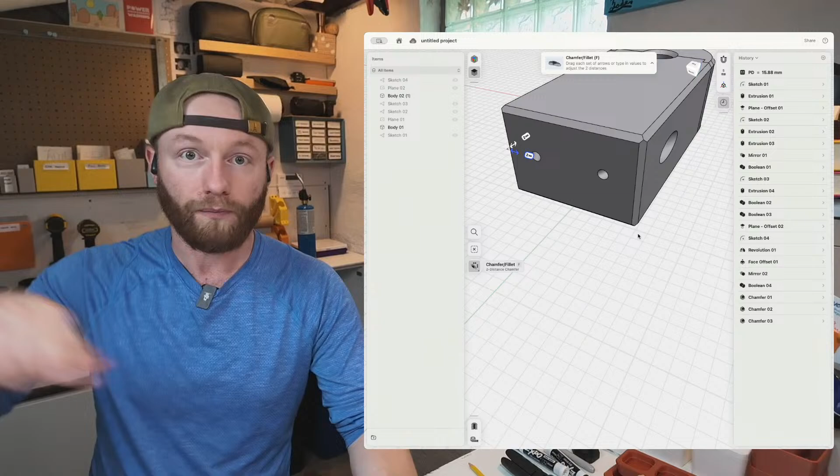Mike, you're speaking truth again in there. I think the biggest thing to know, which isn't always what people want to hear, is that the best thing you can do is just start. Mike is 100% right, a lot of this is just experimentation. Like, you saw how much of a struggle it was, I didn't even know you could put inches in here instead of millimeters. But it's the act of doing that gives you the learning, and it's the learning that allows you to apply it back to what you're doing. That's the loop, and without the doing, there is no learning. So just start doing stuff and testing around. Before I sold anything on Etsy, I was 3D modeling and printing things for myself at home for a year. So it's not like you really need to spend a ton of time doing it.

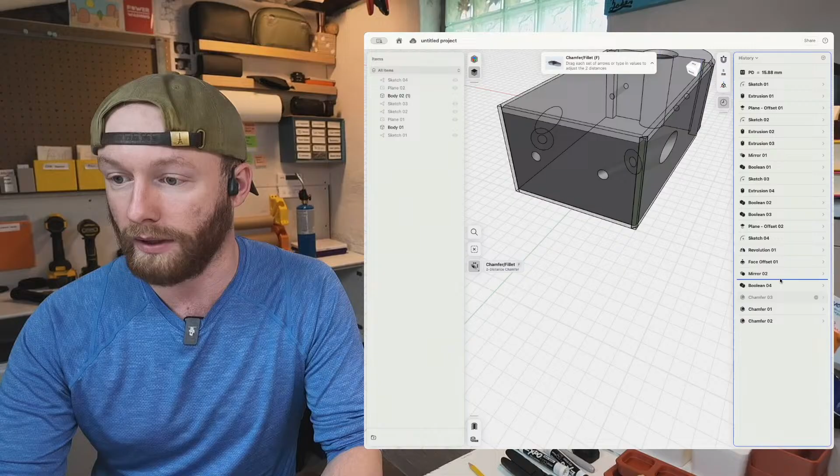Not a ton of time. Okay, I think we're in a pretty good spot here. I'm going to actually change this back to 16. This is going to be my product for now.

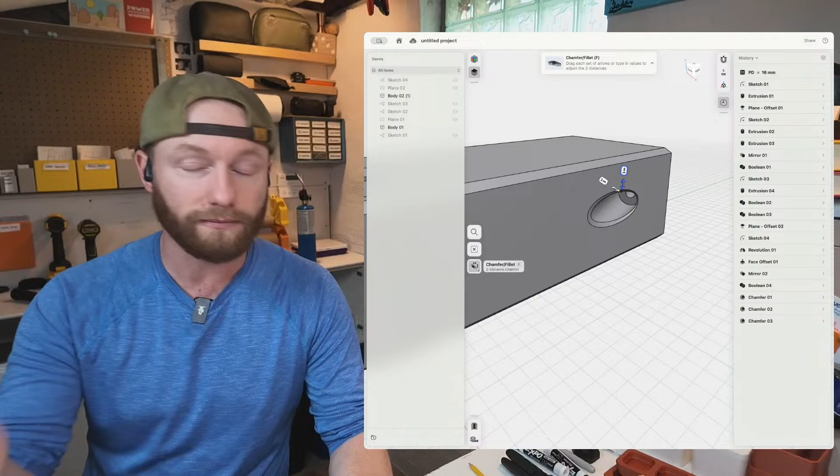I will let everybody know how it turns out. I'm sure I'll do a short video, or the weekend video is going to be a little bit different in format from my normal videos. I'm going to try to do more of a cinematic type video, kind of like the short I put out just yesterday. I need to have a product already designed that then I can document how I designed it. So this might be what you see in that video. I don't know yet, but I kind of like the way it turned out.

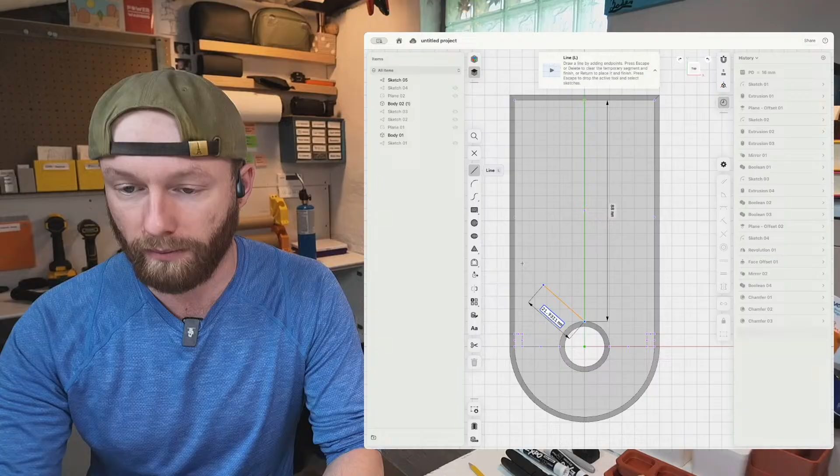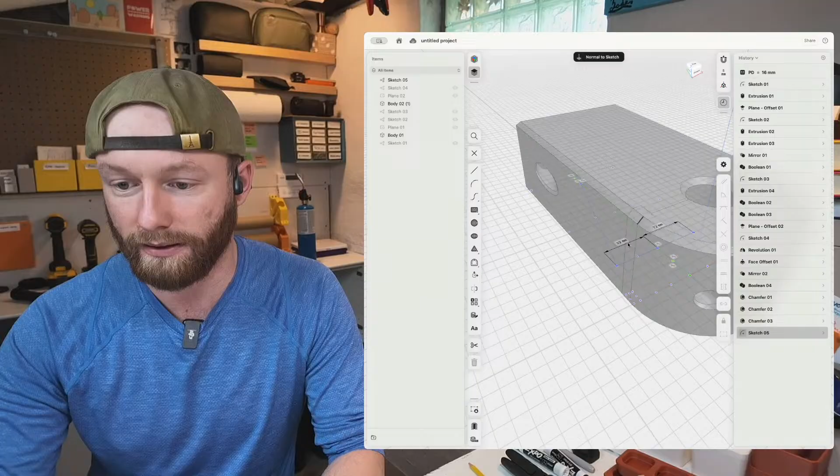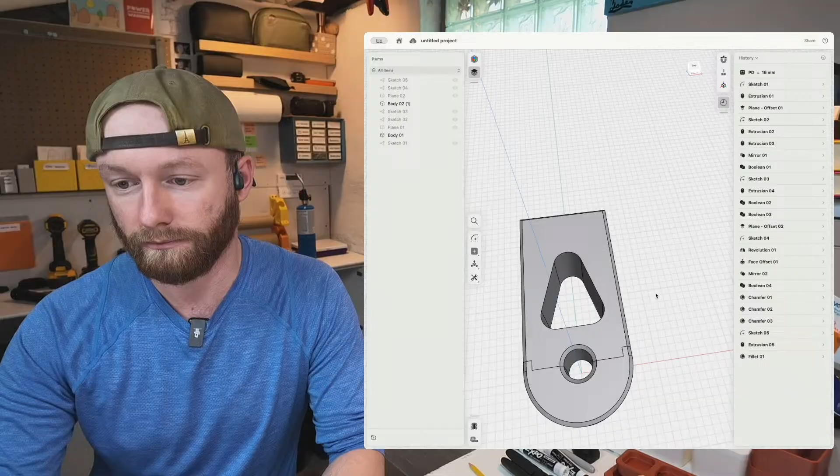The other thing I could do here is make it hollow. I don't think that's necessary, but I could make it hollow, might look cool. Hold on a second. I know we're basically done with the stream, but I just need to test this out. Can I make it a triangle? Let's go down here, we'll go to 22. This is what I'm talking about, experimenting a little bit. 22, oops. Because I'm just messing around, testing stuff out, seeing what I like. I guess I put it on the bottom, so that's fine. We'll punch it up through, and that's good to know, basically hit the edge of the holes there that come through. I'm going to grab these, got it, and we'll do a fillet, do something like that. I don't know, I'll experiment with that later. I think it looks kind of cool. Once you get the functional piece, then you can add some bells and whistles to it.

Let me see if there's any last questions, and then we're going to wrap it up here for the day.

I build things. I made a fidget spinner and made over 1,400 from MakerWorld. Could have made more if I sold the digital products separately. Wow, that's great news.

Marcy, the name of the software is Shapr3D. Just a heads up, it is a paid software. That's the downside.